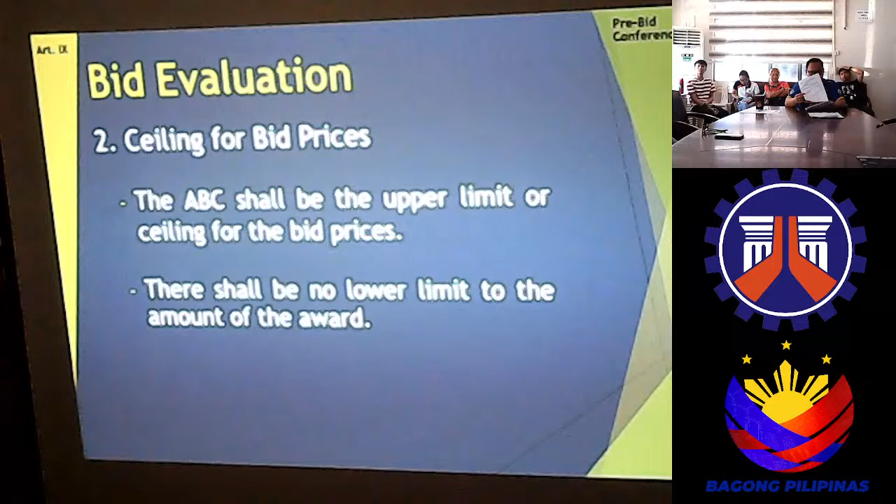Thank you, sir. First is the bid evaluation. Preliminary examination of bids: the BAC will examine first the technical components of the bids using the pass or fail criteria. Ceiling for bid prices: the ABC shall be the upper limit or ceiling for the bid prices. There shall be no lower limit to the amount of the award.

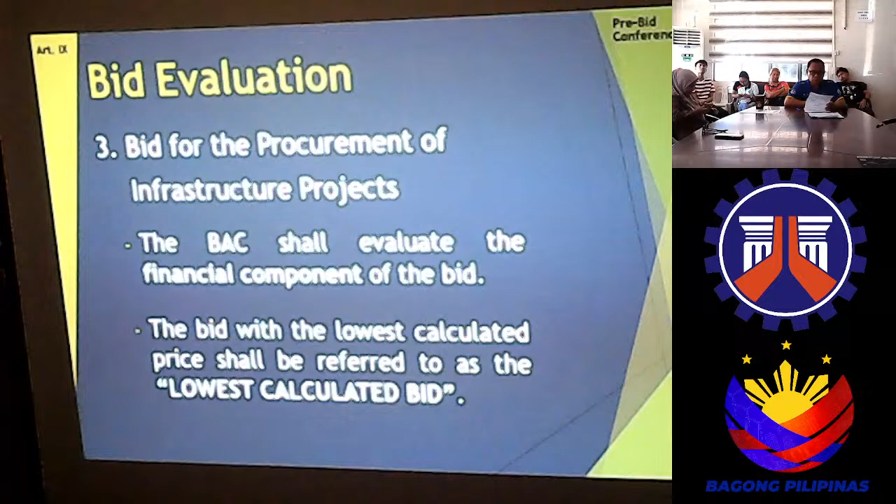Bid for the procurement of infrastructure projects: the BAC shall evaluate the financial component of the bid. The bid with the lowest calculated price shall be referred to as the lowest calculated bid.

Post-qualification: objective and process of post-qualification. Post-qualification is a stage where the bidder with the lowest calculated bid undergoes verification and validation on whether he has passed all the requirements and conditions specified in the bidding documents. If the bidder with the LCB passes all the criteria for post-qualification, his bid shall be considered the lowest calculated responsive bid, or LCRB. In all cases, the contract shall be awarded only to the bidder with the LCRB.

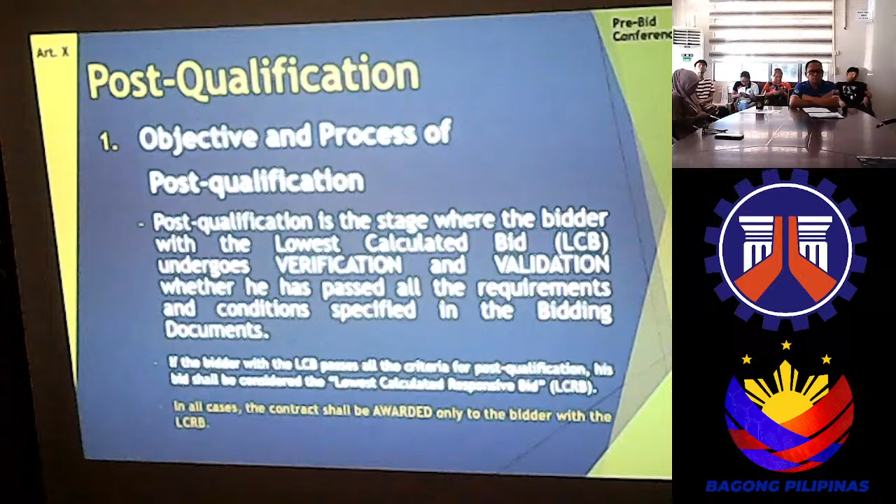Failure of bidding: there shall be failure of bidding if no bids are received, no bid qualifies as LCRB, or whenever the bidder with the LCRB refuses, without justifiable cause, to accept the award of contract, as the case may be.

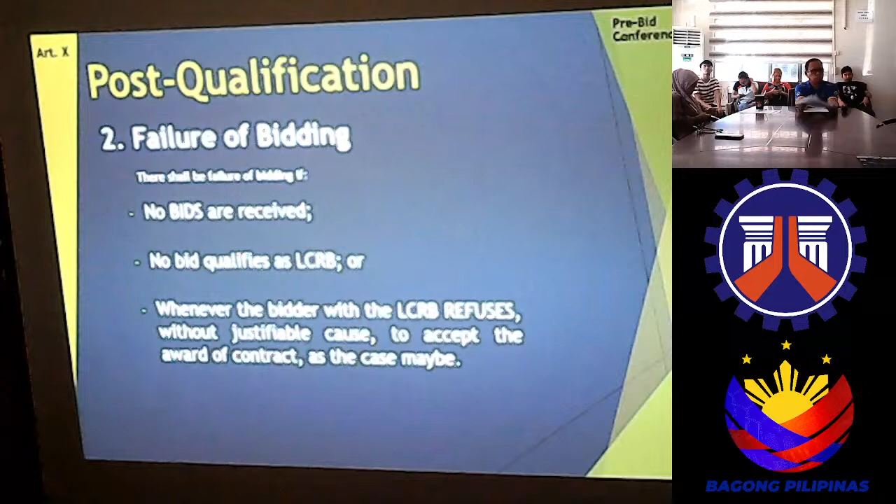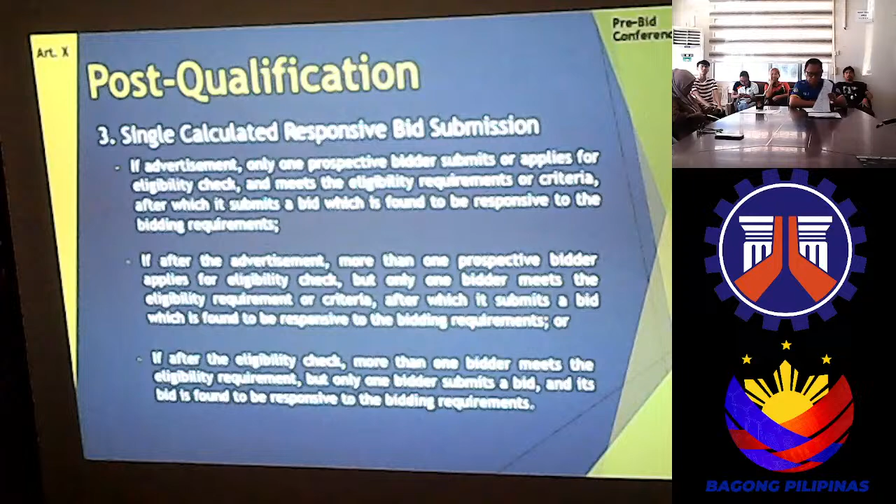Single calculated responsive bid submission: if after advertisement only one prospective bidder submits or applies for eligibility check and meets the eligibility requirements or criteria, after which it submits a bid found to be responsive to the bidding requirements. If after advertisement more than one prospective bidder applies for eligibility check but only one bidder meets the eligibility requirement, after which it submits a responsive bid. Or if after the eligibility check more than one bidder meets the eligibility requirement but only one bidder submits a bid, and its bid is found to be responsive to the bidding requirements.

Award. Notice and execution of award. Within a period not exceeding 15 calendar days from the determination and declaration by the BAC of the LCRB and the recommendation of the award, the HOPE or its duly authorized representative shall approve or disapprove the said recommendation.

In case of approval, the head of the procuring entity or its duly authorized representative shall immediately issue the notice of award to the bidder with the lowest calculated responsive bid.

Within 10 calendar days from the receipt of NOA, the winning bidder shall formally enter into contract with the procuring entity. When further approval of higher authority is required, the approving authority for the contract shall be given a maximum of 15 calendar days to approve or disapprove it.

The procuring entity shall issue the notice to proceed to the winning bidder not later than 7 calendar days from the date of approval of the contract by the appropriate authority.

All notices called for by the terms of the contract shall be effective only at the time of receipt thereof by the contractor.

Points to remember: submit bid on or before the date and time specified in the invitation to bid. Counter-check your documents as to correctness and completeness before submission. The ABC should be the ceiling for the contract cost, and envelopes A and B should be properly separated.

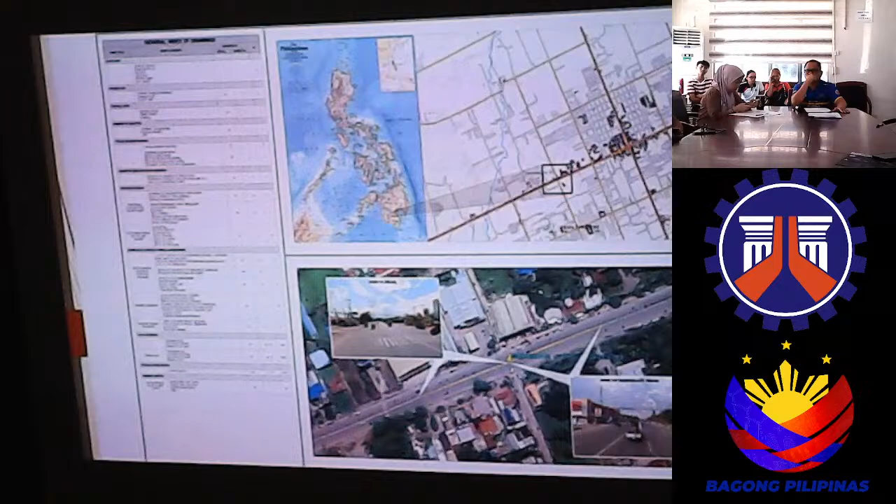And then there's a bike lane. Okay, so this is the development plan. So this is the scope of works.

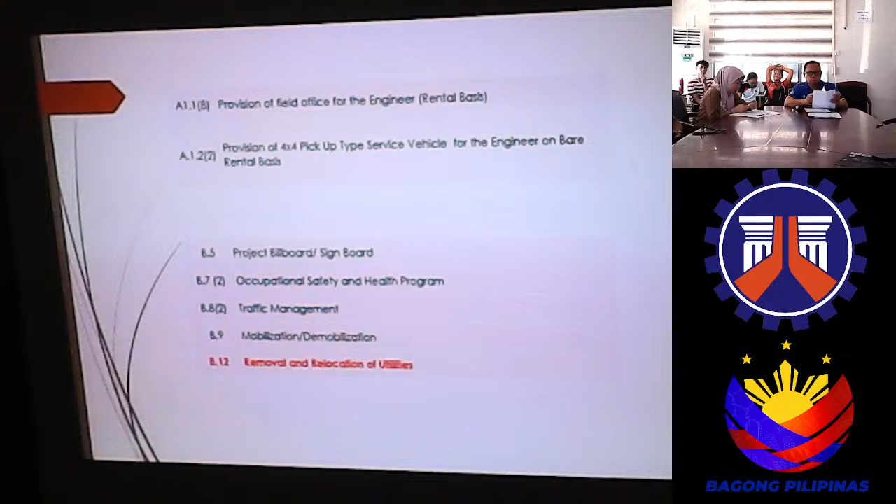Provision of field office for the engineer, provision of 4x4 pickup, project billboard and signboard, occupational safety and health program, traffic management, mobilization, removal and relocation of utilities — we already coordinated with Sokelco regarding this. And then clearing and grubbing.

So for clearing and grubbing: cutting of branches of trees beside the National Highway, and then removal of actual structures and obstructions, removal of existing PCC of the local road.

And then for the PCCP, Portland Cement Concrete Pavement, this is near Lagon, on the right side going to Tacurong.

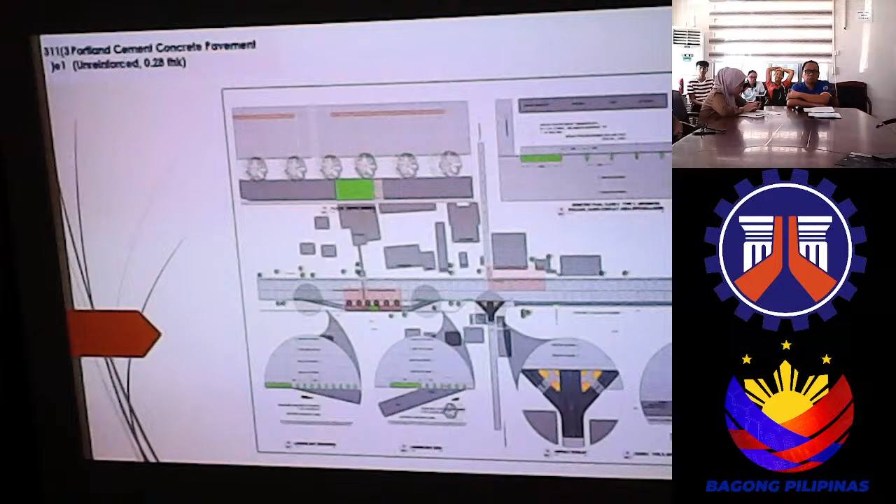And then replacement of removed PCCP — this is near Mercury, on our local road there.

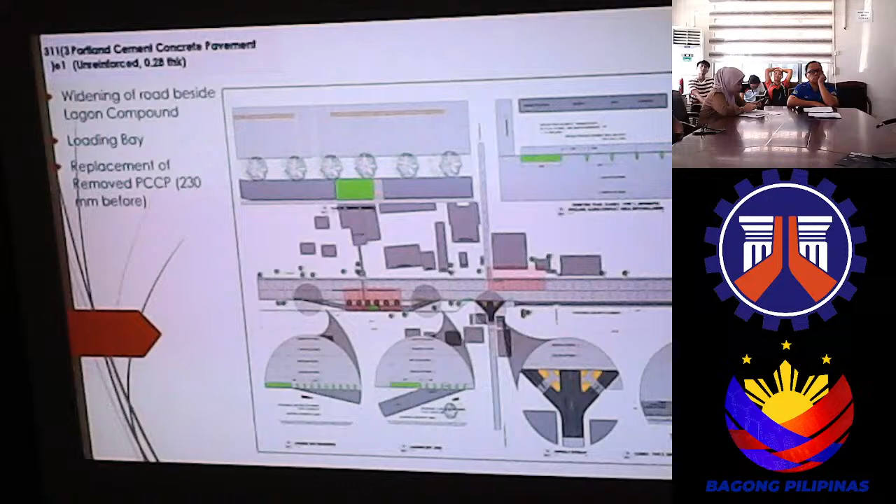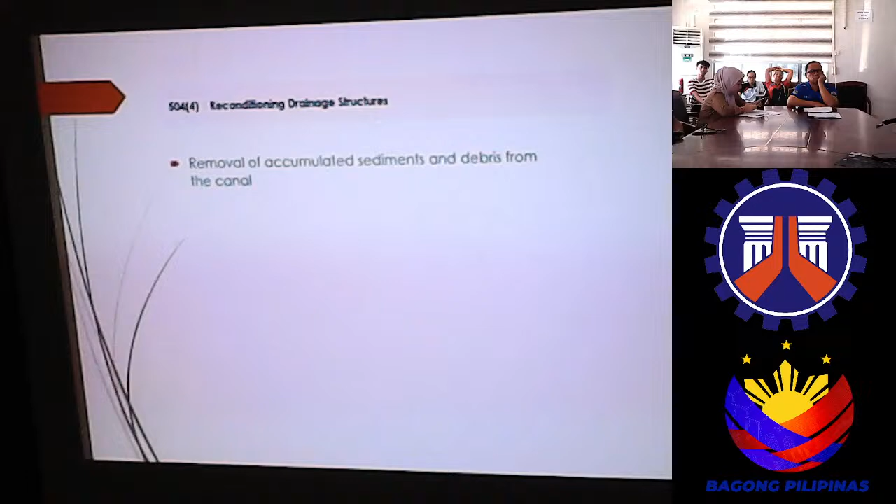And then reconditioning of drainage structure — removal of accumulated sediments and debris from the canal. So there will be clearing done on our canal.

And then we will put warning signs for pedestrians, and regulatory signs for the bike lane and for the loading and unloading zone at our loading bay.

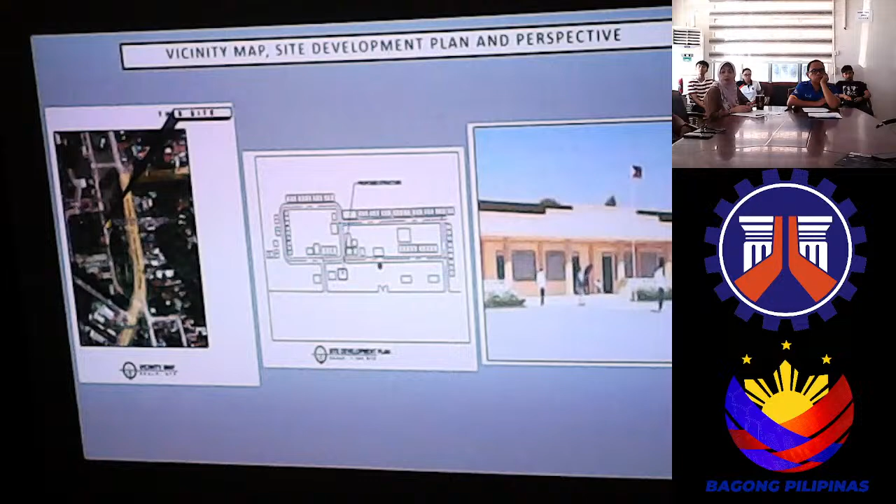And then this is the perspective of the one-story two-classroom building. This is the floor plan.

The floor plan includes 2 classrooms of 7 by 9 meters, each with its own CR, and we have hand washing facilities at both ends of the two classrooms. The overall area of this is 18 by 7 square meters.

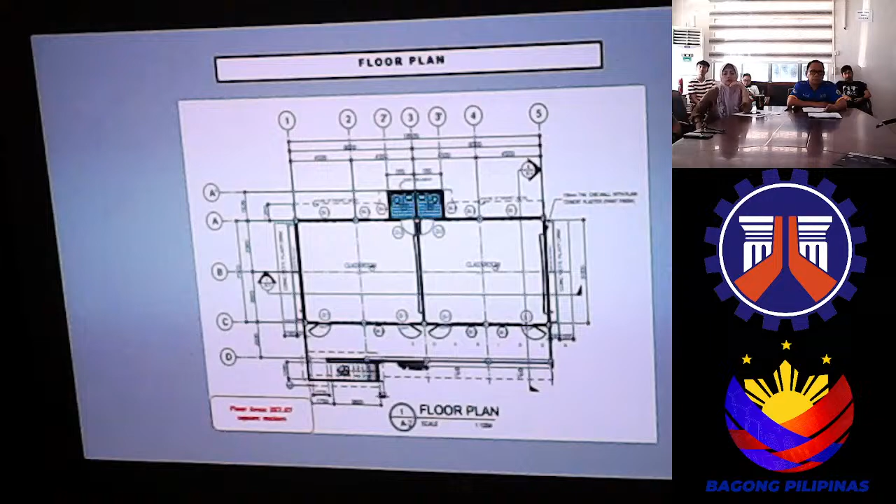We also have the corridor, and then the front elevation plan and the left side elevation.

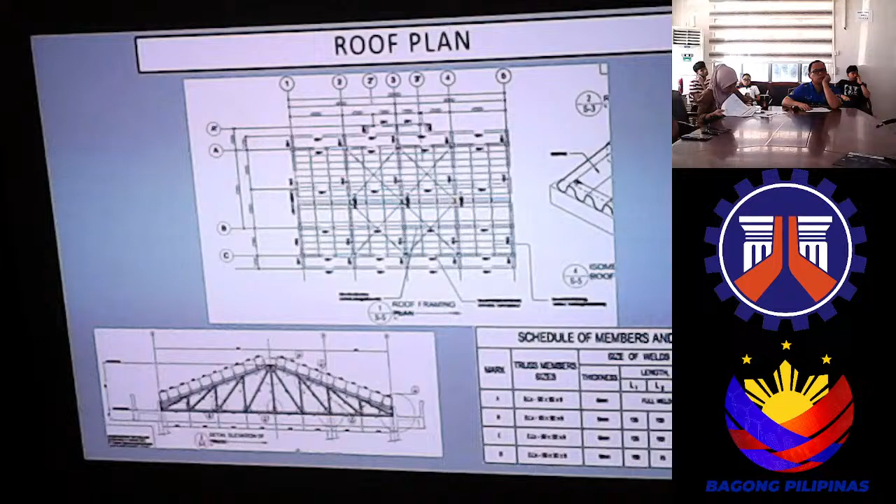This is the roof ceiling plan, and we have the reflected ceiling plan in the drawing, and then this is the detailed ceiling plan for Isulan Central School. And we have the roof plan.

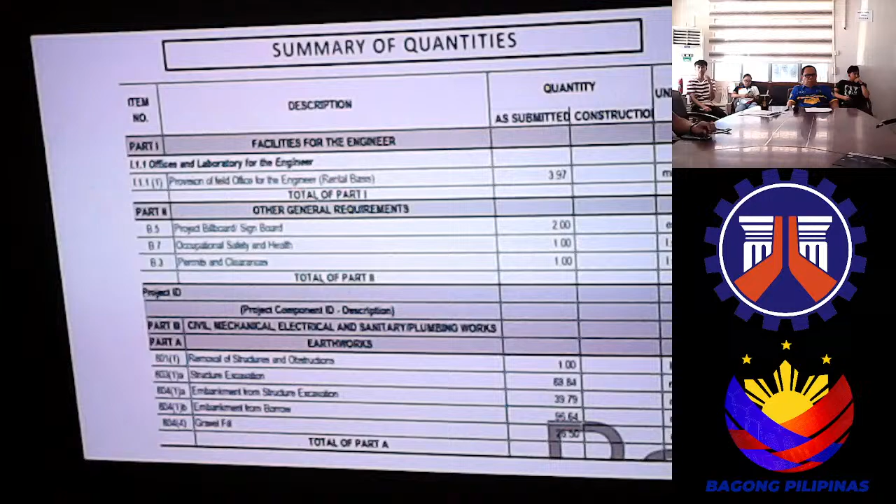Structure excavation, embankment from the structure excavation, and embankment borrow. We have also the gravel fill.

The structural concrete for footing, column, beam, and the reinforcing steel grade 40, and reinforcing steel grade 60.

We have also the masonry works, the 100 CHB non-load bearing, and the 150 CHB non-load bearing. And for the jalousie, we use...

Jalousie glass windows, wooden doors, and then we have the grills, finishing hardware for the lock sets, and the carpentry and joinery works, the blackboard and the armrest.

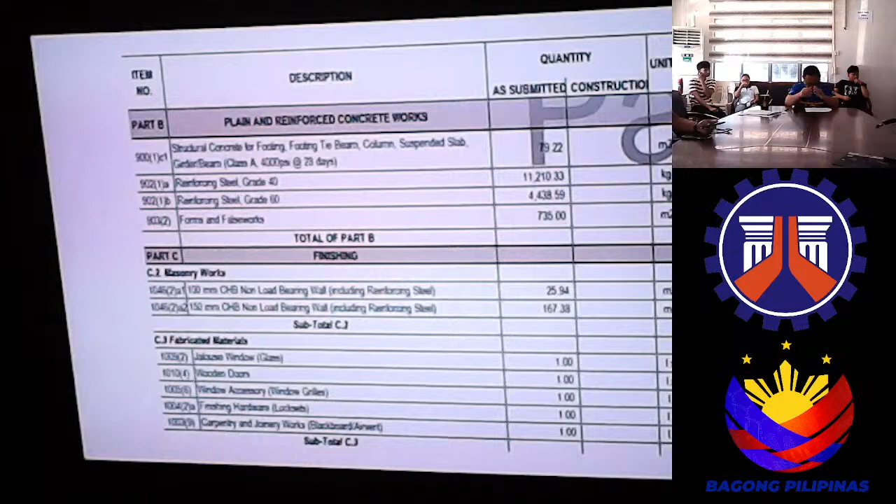We have also the plain cement finish with floor hardener, pre-cast concrete molding, plain cement plaster finish, railings and handrails, fiber cement ceiling on metal frame.

The reflective insulation, cement base waterproofing, masonry concrete painting, wood painting, and metal painting.

We have also the pre-painted metal sheets long span, the pre-painted roofing, accessories for ridge roll and flashing.

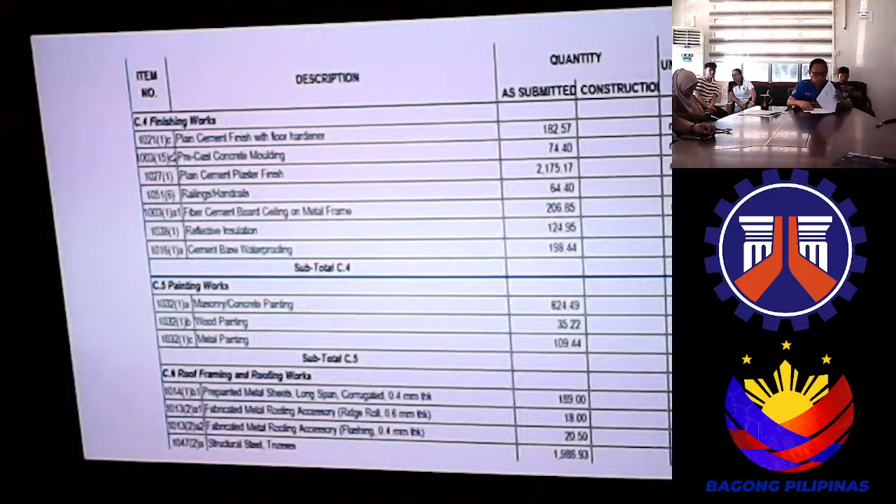We have the structural steel trusses, and structural steel purlins, metal accessories, steel plates, the sag rod cross bracing, turnbuckle, and the bolts.

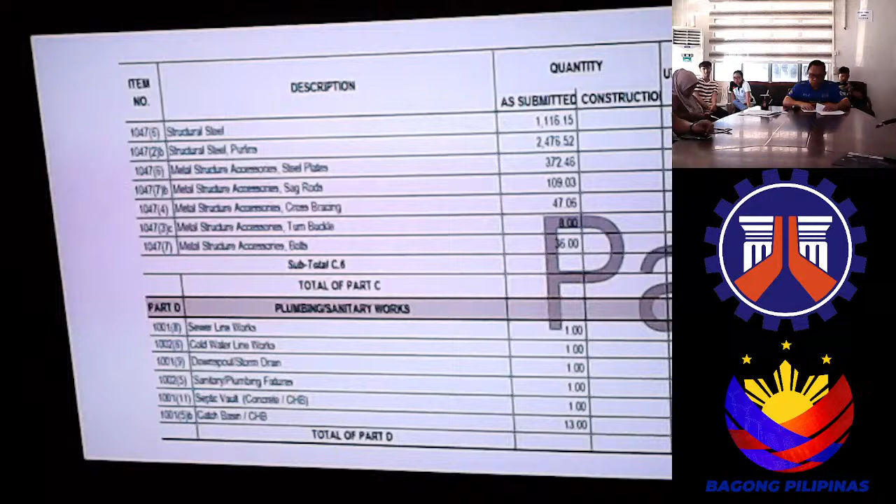We have the plumbing and sanitary works: sewer line, cold water line, downspout, sanitary plumbing fixtures, septic vault, catch basin, and here the electrical conduit boxes, wire and wiring devices, panel board, light fixtures, lamp, fire alarm is included here. Thank you.

So we have here the construction of a one-story, three-classroom school building at Casilda. The location is at Casilda, P. Venus, City of Tacurong, Sultan Kudarat.

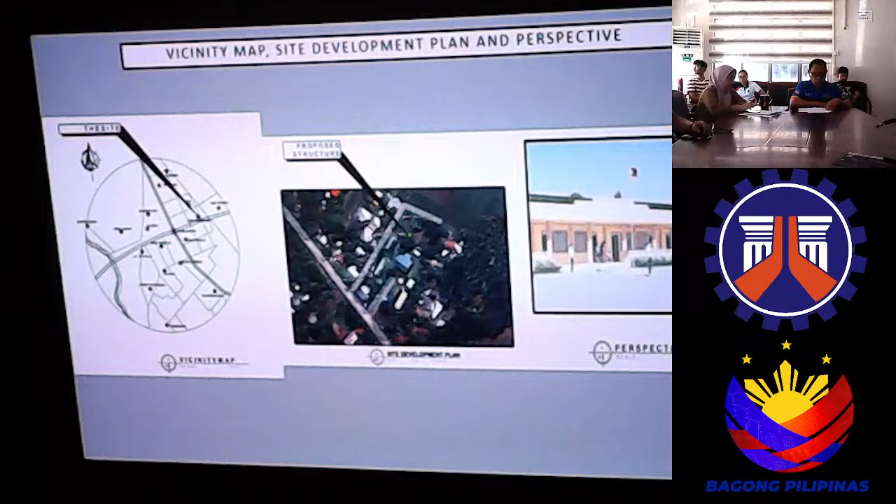Going there. And then the floor plan, we have 27 by 7. Each classroom has 9 by 7. And we have also here...

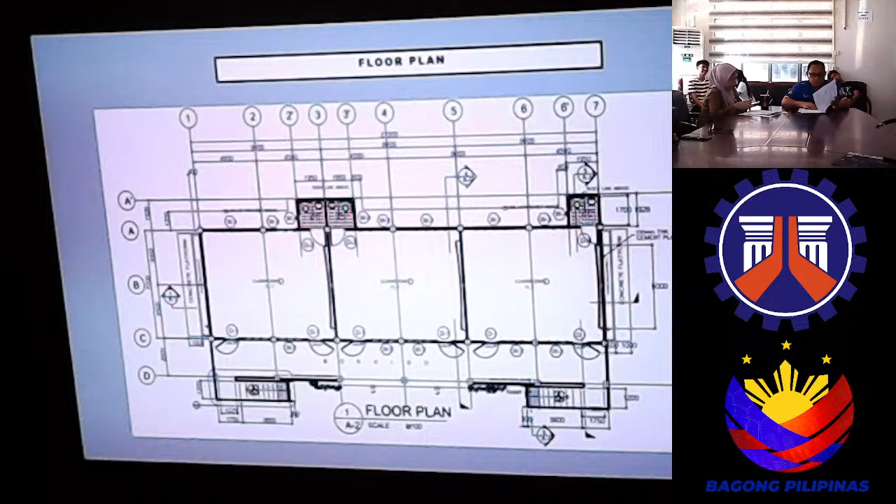The CR in each classroom. Hand washing is not included here. And then we have the corridor and the railings.

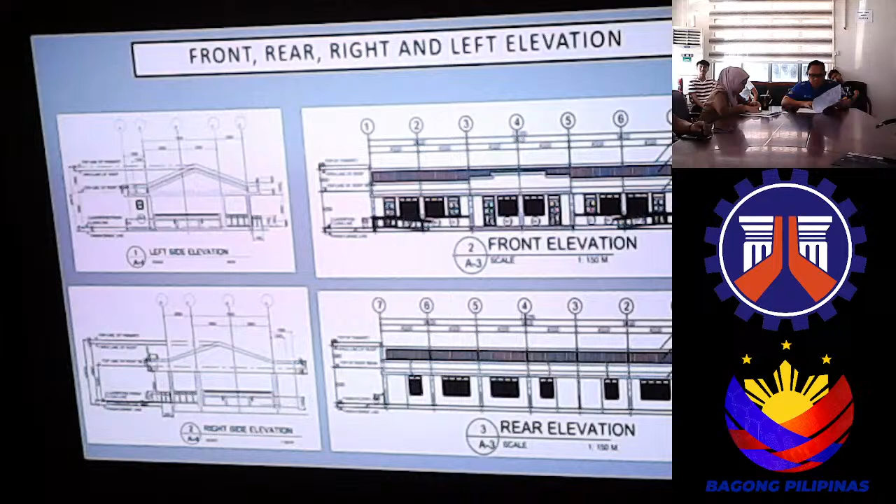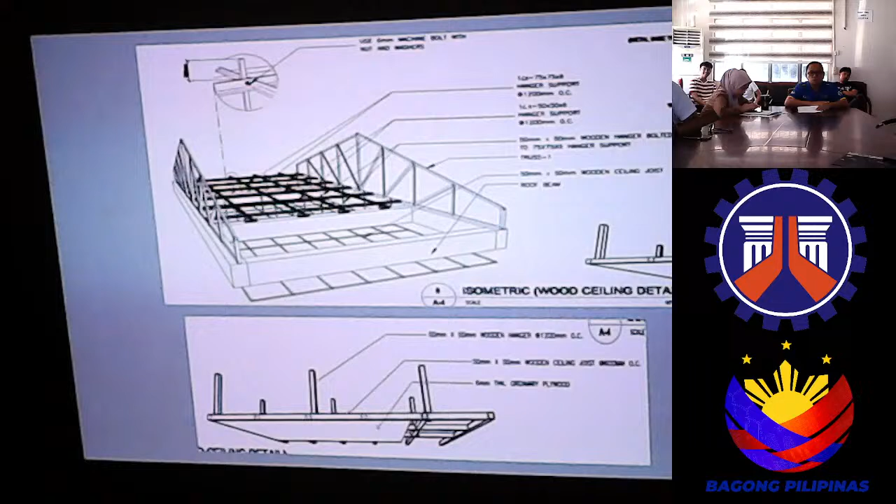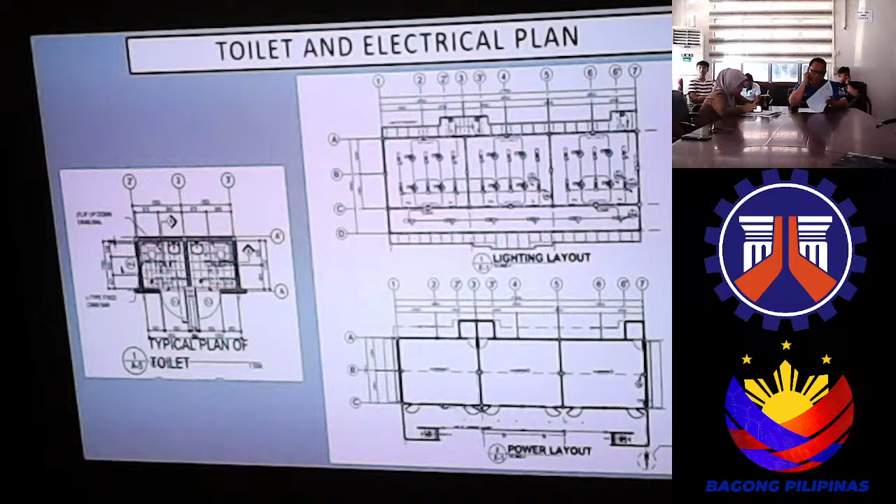And then we have here the toilets. The classroom has its own toilet, and then the lights and...

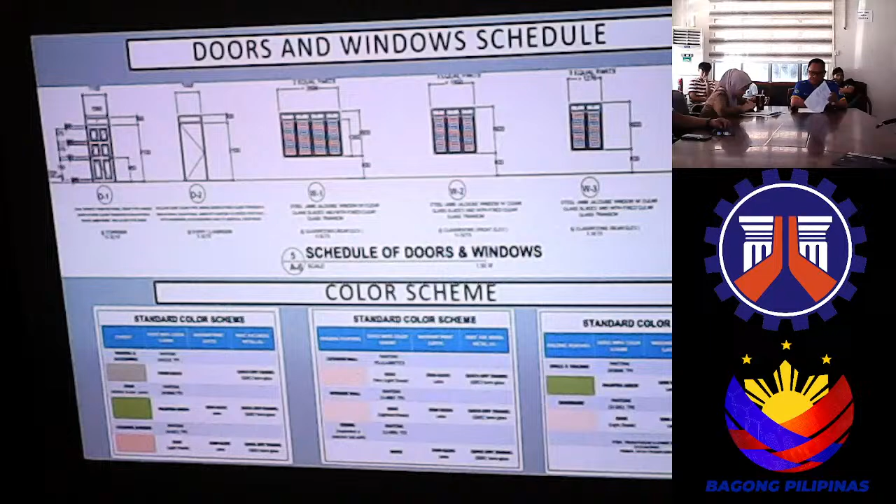The schedule of doors and windows, and we have also the windows which have the grills to be installed, and the color scheme is...

Excuse me. The earthworks, here is the removal of structures and obstruction. There's a small concrete structure there, and the site also has some grass/weeds.

And then the structure excavation, embankment from borrow, and then the gravel fill. The plain and reinforced concrete works is as follows: structural concrete, and then the reinforcing steel grade 40 and reinforcing steel grade 60.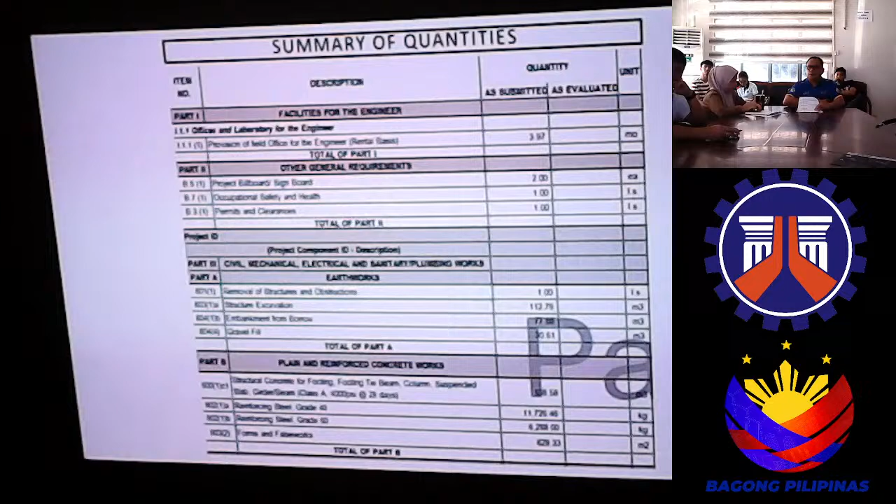Including here is the forms and falsework. The masonry work, we have to use the 100 CHB non-load bearing and the 150 non-load bearing.

And the fabricated materials are the jalousie, doors and windows accessories, finishing hardware, carpentry and joinery works. Finishing works includes the molding, precast plaster, railings, ceiling with 4.5 metal frame fiber, waterproofing, and the painting works.

We have masonry painting, wood painting, and steel painting.

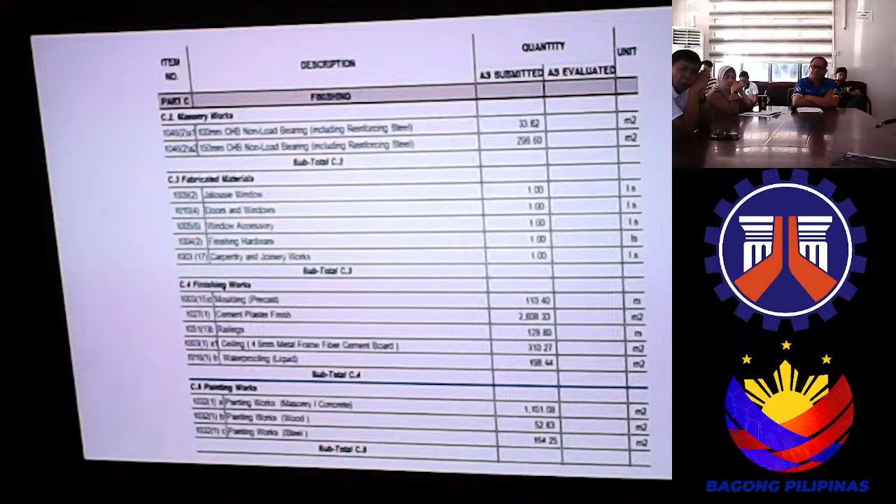The roof framing and roofing works, we have to use the long span. And then we have also the ridge roll.

It is fabricated, pre-painted, and then flashing, structural steel for trusses, and the structural steel for the frame of the ceiling.

We have also the structural steel for the purlins, and then the metal structure accessories in plates, sag rod cross bracing, turnbuckle bolts.

Sewer line is included, the pipes with fittings connection, and the storm drainage and downspout, plumbing fixtures, septic tank, catch basin. The electrical works include conduit boxes and fittings, wires and wiring devices, panel board, and...

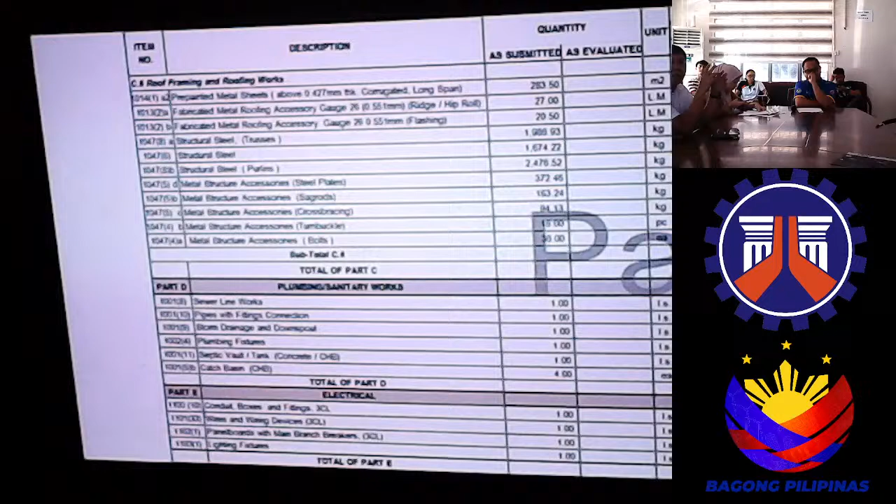Panel boards with main branches, breaker, and then lighting fixture. That's all. Thank you.

Thank you very much, Engineer Edna Gilmarilnia, for the clarification and explanation of the scope of works and specification of the 3 school building projects. And last but not least, construction of multi-purpose building within the Narra Park, Isulan, Sultan Kudarat.

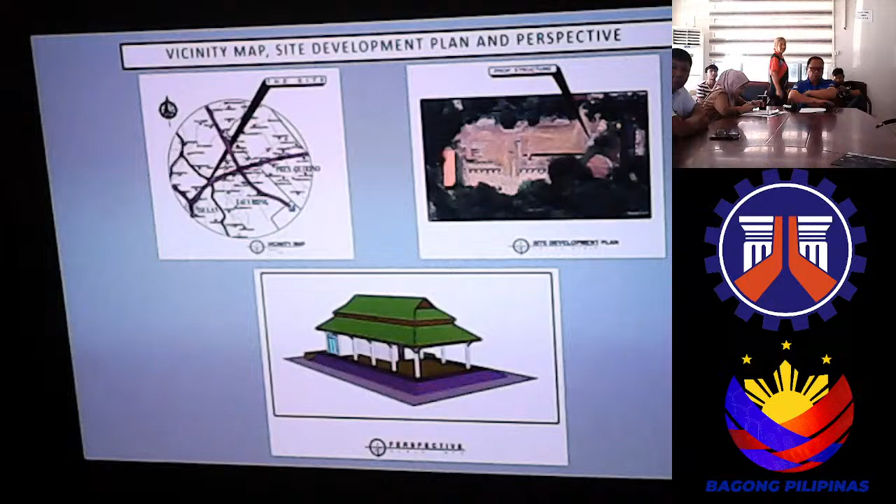Then the floor area, total floor area is 334.311 square meters, with embankment from the natural grade line of 1.3 meters, from the finished grade line to the finished floor line, 0.75 meters, from finished floor line to the top of the tubular lattice, 3 meters, and the height of roof is 4.5 meters with pre-painted GI louver.

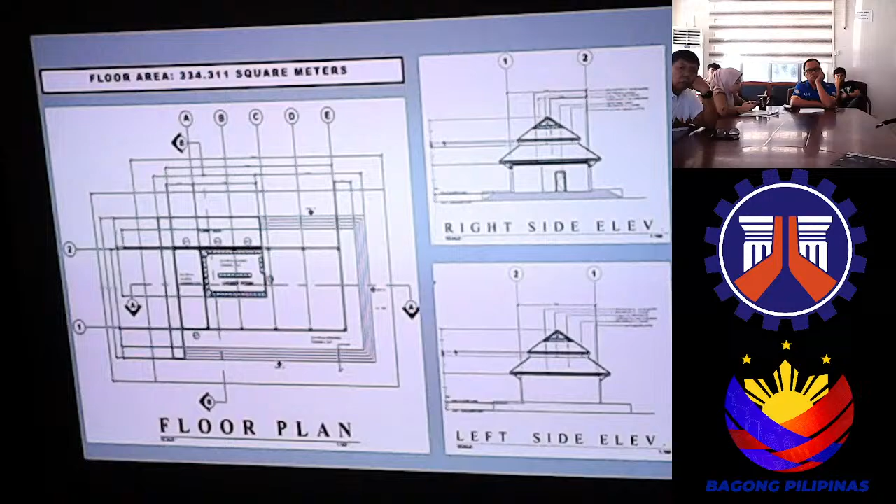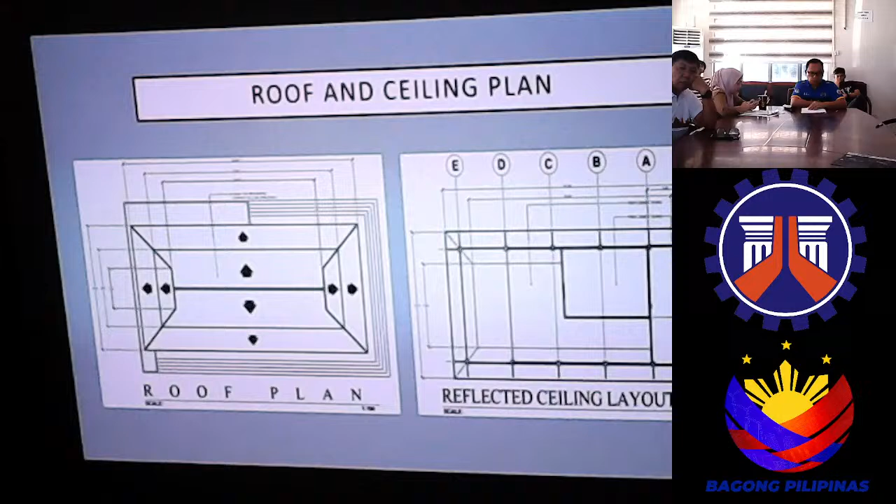In the locker room, we have tinted sliding glass window on analok frame, 2 sets. In the room, tinted sliding glass window on analok frame, 1 set. Sliding door at entrance, tinted with glass header, complete accessories on analok frame. And for the locker room, one set of panel door, Class A with complete accessories, four heavy-duty hinges, doorknobs, heavy-duty, and door closer.

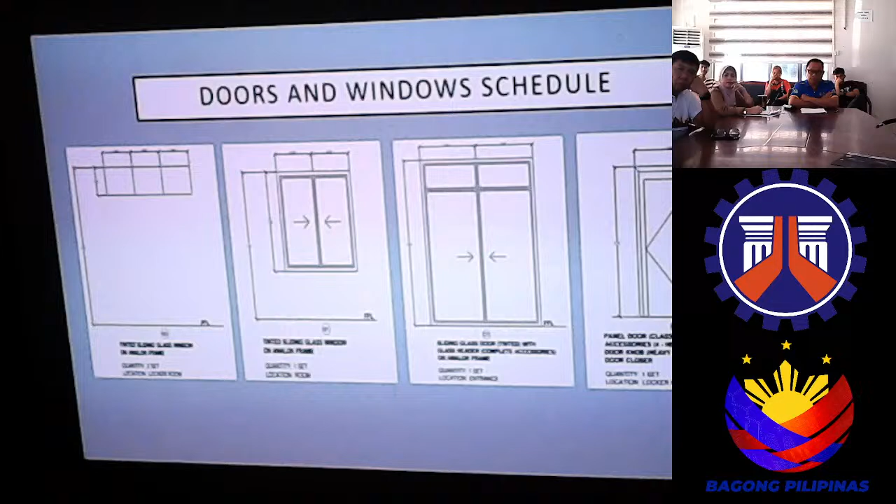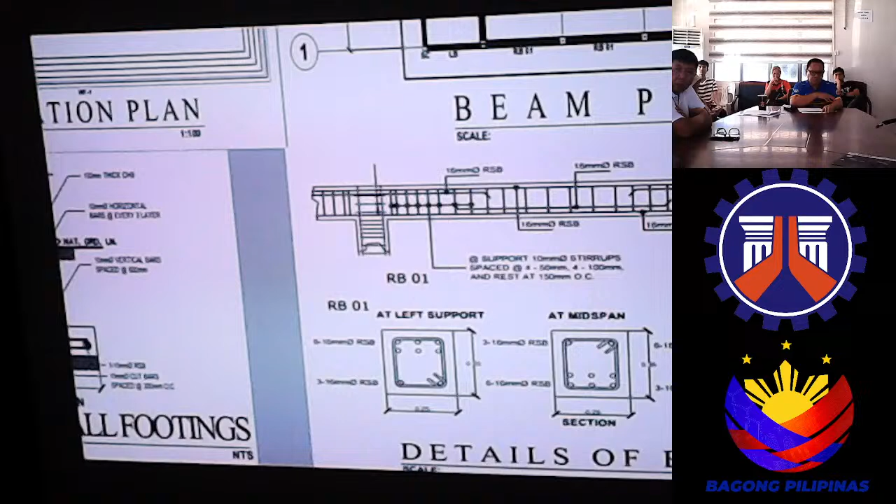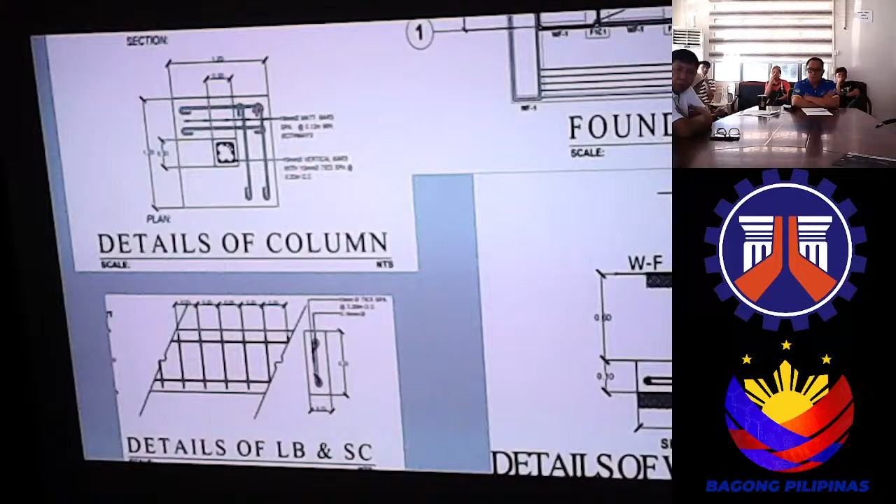The beam sizes is 250 by 350 mm with 3 to 16 mm reinforcement bar. For the wall footings, we have 0.3 by 0.1 with 3 mm, 3 10 mm reinforcement bar and 10 mm cut bars. For the columns or the foundation, 1.2 by 1.2 meters with 16 mm mat bars, 0.12 meters both ways.

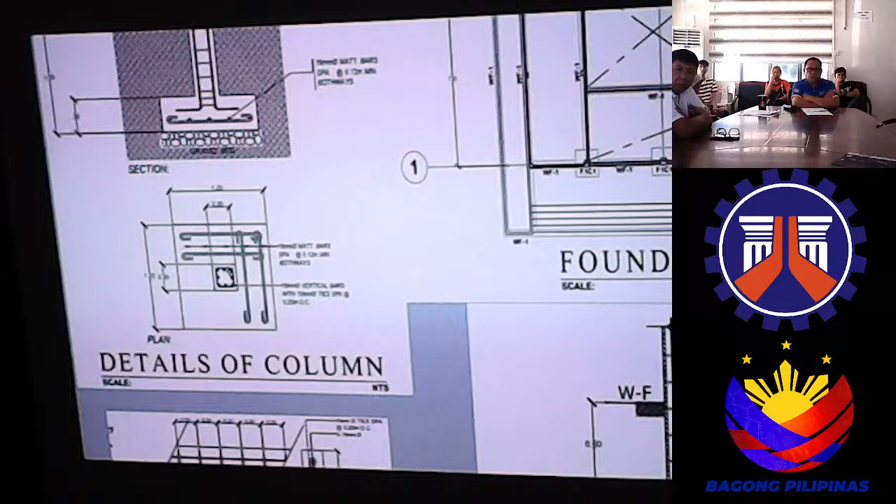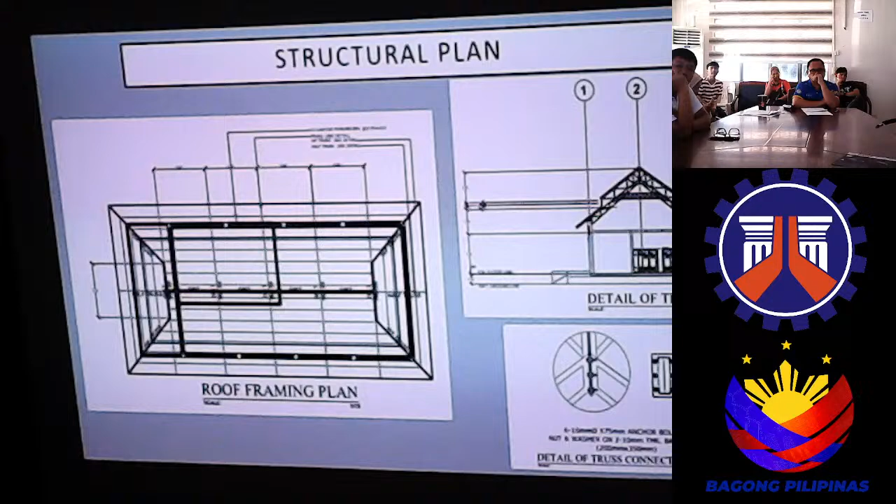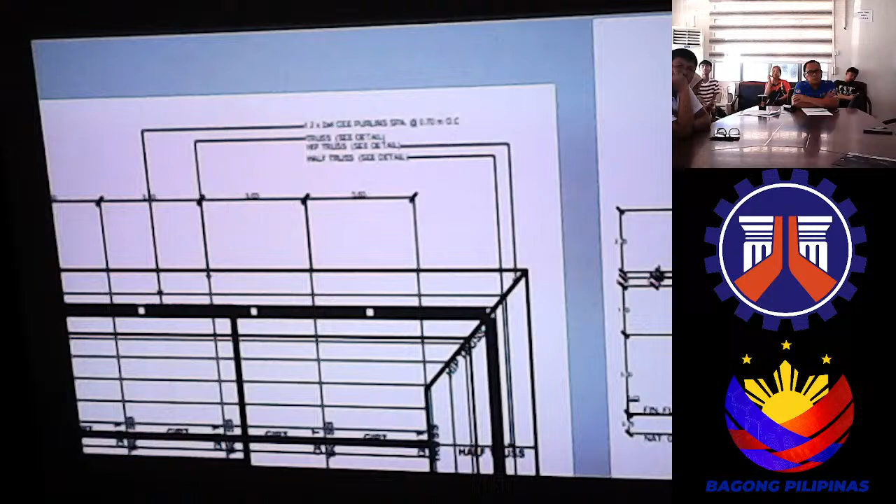For the roof framing plan, with 1.2 by 1.2 mm thick by 2 by 4 cee purlins spaced at 0.70 on center, hip truss, half truss, detail for the truss connector plate with 16 mm diameter by 75 mm anchor bolt with nut and washer on 2-10 mm thick base plate.

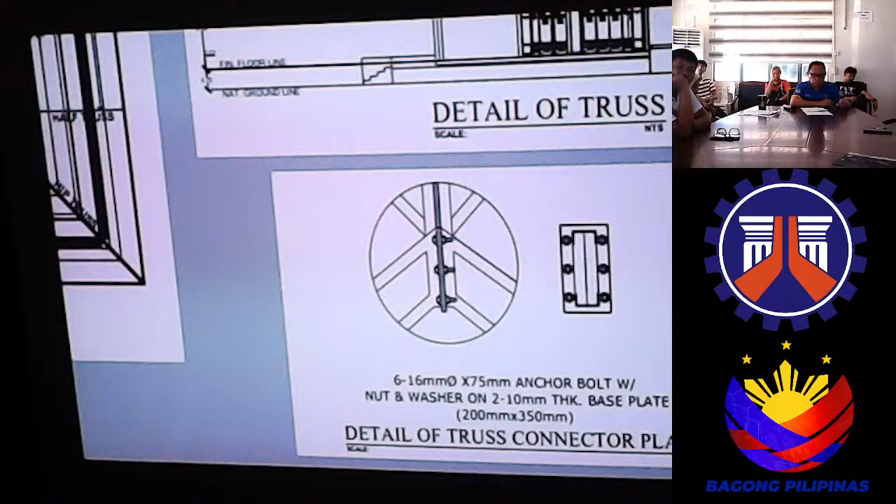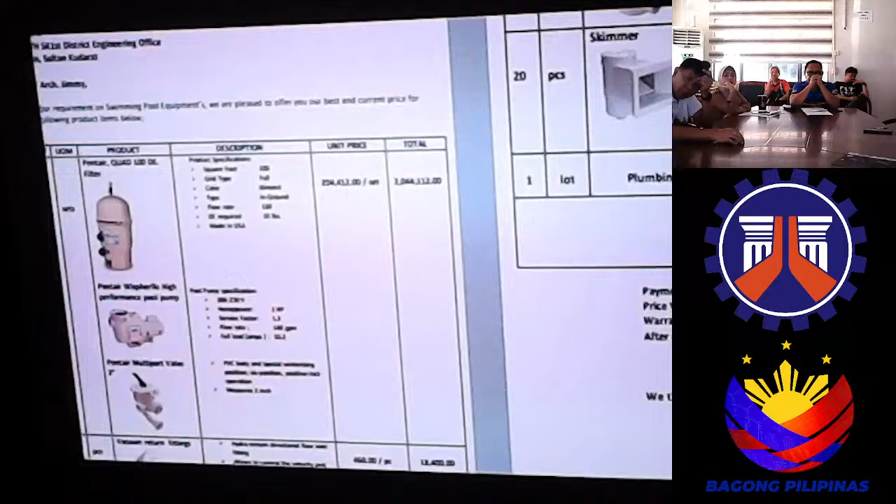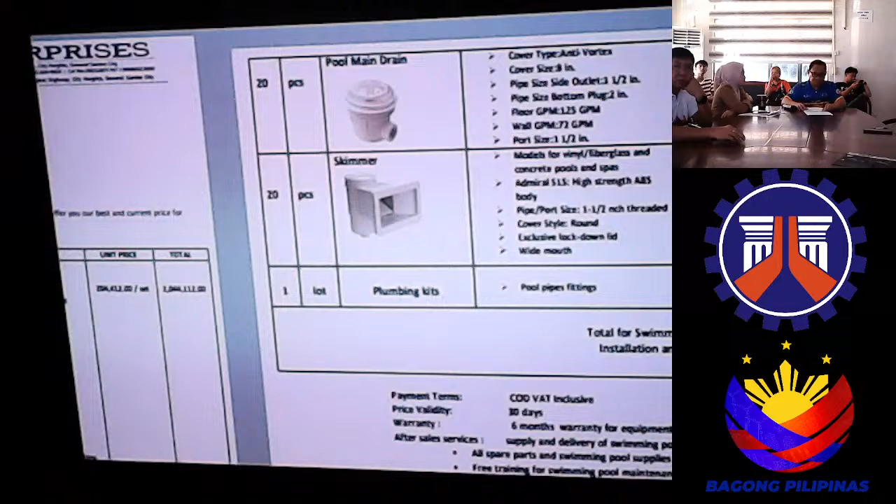The plan or the project also includes the filtration system equipment for the Olympic swimming pool. These are the sample or the quotation. It includes 10 sets of Pentair, 40 pieces of vacuum return fittings, 40 pieces of suction fittings, 20 pieces of main pool drain, 20 pieces of skimmer, and 1 lot for the plumbing kits for the pool pipe fittings.

For the summary of quantities, it includes the provision of field office of engineer rental basis for 4 months, permits and clearances, 1 lump sum, project billboard or signboard, 2 each, occupational safety and health program, structure excavation, embankment from structure excavation, embankment from borrow, gravel fill, structural concrete 3000 psi.

Class A at 28 days, reinforcing steel bars for concrete structure grade 40, formworks and falseworks, 100 mm CHB non-load bearing, 150 mm CHB non-load bearing. It includes the reinforcing steel bars.

Next is the wood panel doors, aluminum frame glass door, aluminum glass window sliding type, aluminum glass window awning type, window accessory, finishing hardware hinges, cement plaster finish, fiber cement board on metal frame ceiling, glazed tiles and trims, and glazed tiles.